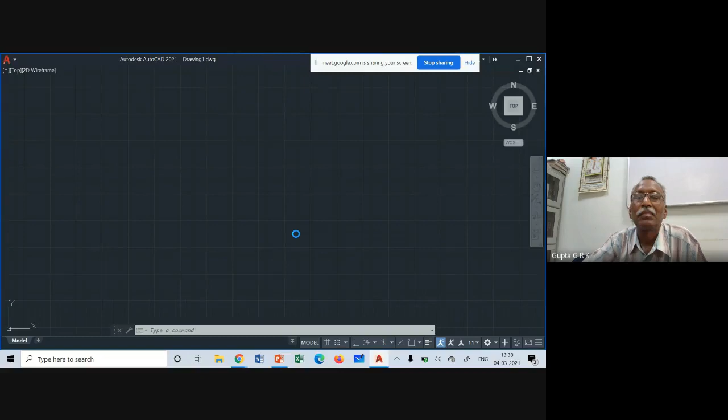So when you have a circular plane or a semicircular plane which is inclined to both planes or something. When it is inclined to one plane, you will see it like an ellipse, that is a perfect ellipse only. But if it is inclined to two planes, the curve that you get may not be, it's a very much distorted one. So we will have only points which are to be joined nicely.

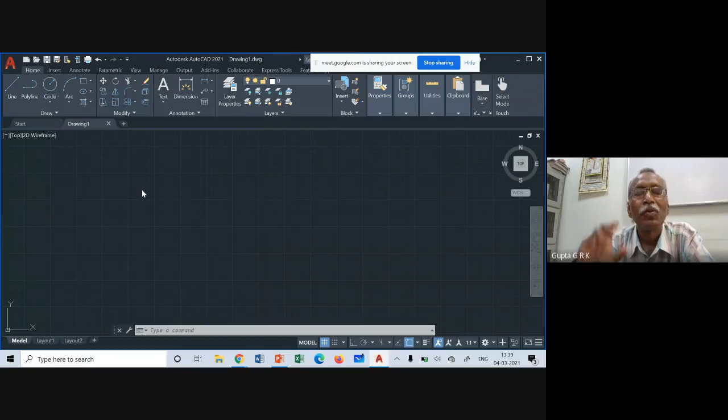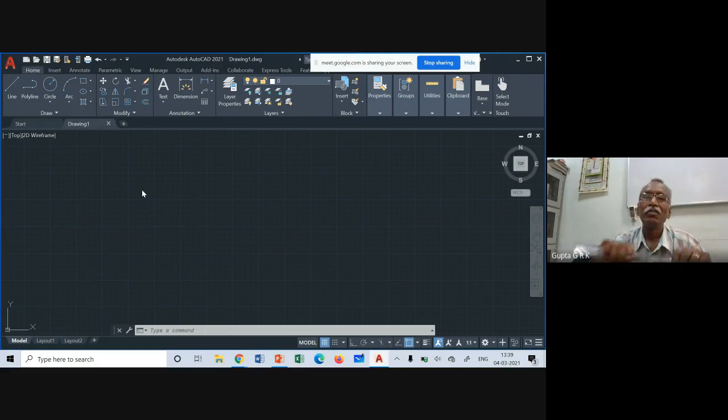There is one particular command called spline. Spline is a term that actually came from old draftsmen. If you have a flexible scale which can be bent like this, so that I can bend it to any shape I want, that is called spline. So if I have a number of points to be joined in a smooth curve, one way is to take that flexible scale and bend it in such a way that it goes through all the points, and then you join. So that is what is called a draftsman's spline.

This spline, also here, if you go to draw and click here, you see the first two curves are there. If you put here, one is spline fit, another is spline CV. So spline fit is the one which we want.

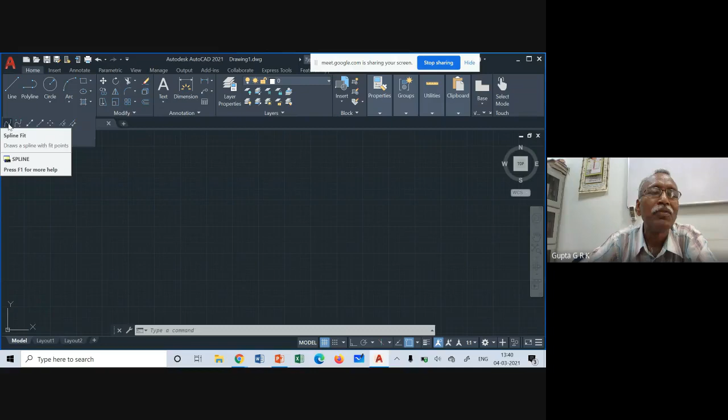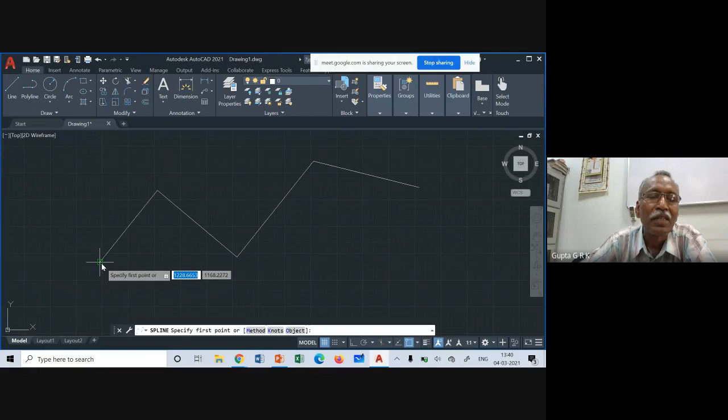So suppose first I draw something like this, some lines I have drawn so that I get some vertices here. If I want to draw a curve going through those vertices, I take this spline and click here. And if you click here, you can see a smooth curve is coming like that, going through those vertices. I can have any number of points like that.

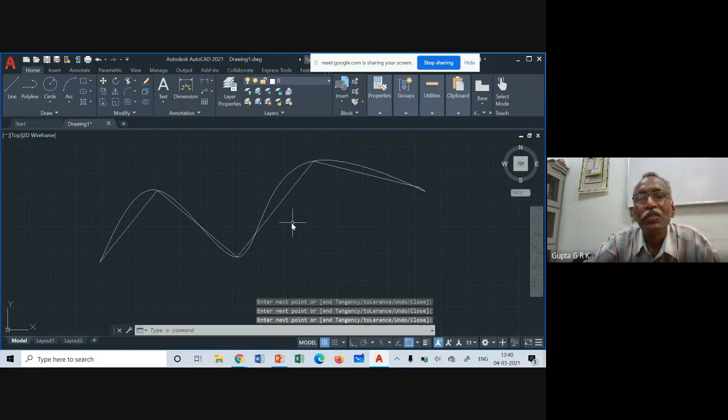Okay, this type of curve is called a spline curve. So whatever complex thing is there, I can join them with a very smooth curve, right? This is one of the best options to have a smooth curve through a given number of points. So that option you can choose.

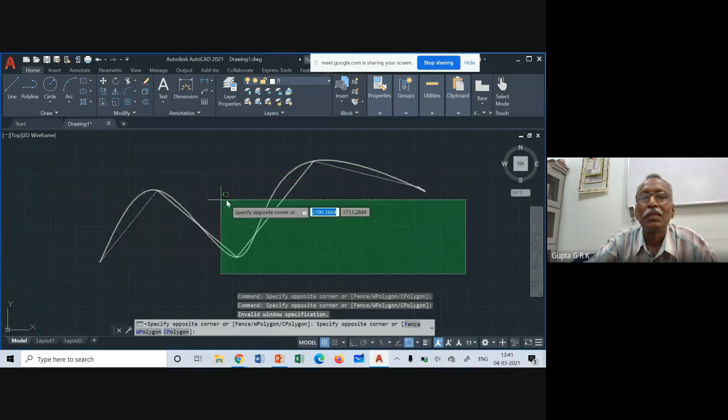And another question he asked: if I am given the true angle of some diagonal, and if I want to turn it into the third position, what is the way I have to go about it? Because in the second position, that diagonal may be shortened. So I have to find out the apparent angle.

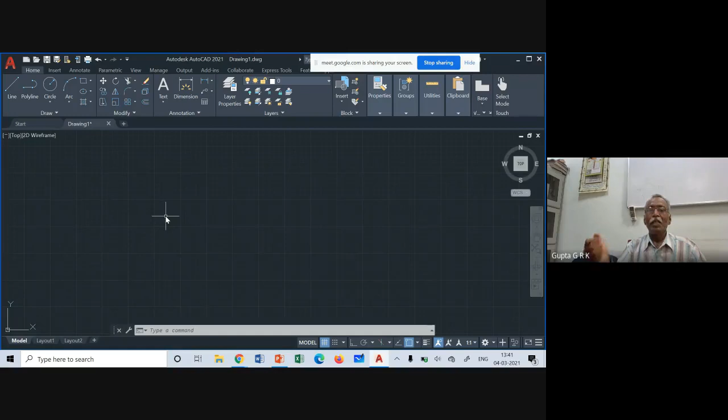Okay, so suppose I draw a line, or take some length of line. So suppose this is a horizontal line, and maybe for example the diagonal may be some 50 mm, and angle may be 30 degrees. And the shortened length may be somewhat smaller. We will see how we can do it.

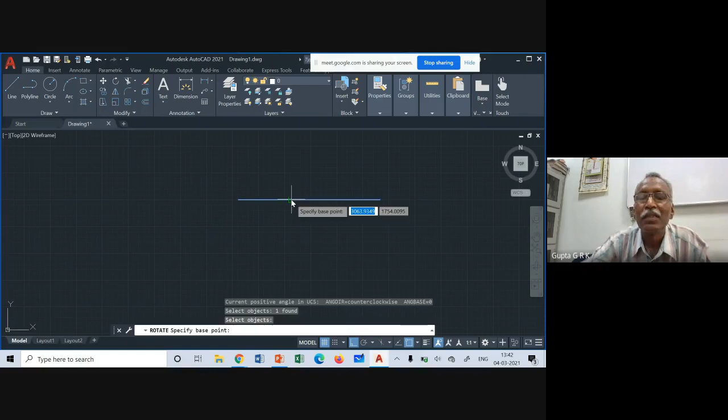First, I have to draw a 30 degree line to this. So I can make it a rotation and choose this, enter, take the base point and type 30, enter. Okay, but I have lost the original line. What I have to do is copy it. So first I draw this line, enter, rotate, enter. Select this, enter, base point, click and copy, C, enter, and then 30, enter. So I got this line.

So on this, I have to mark 50, because 50 is the original length of the diagonal. So what I do is draw a circle. Take this as center, and with 50 as radius, I can draw this circle. So 50, enter.

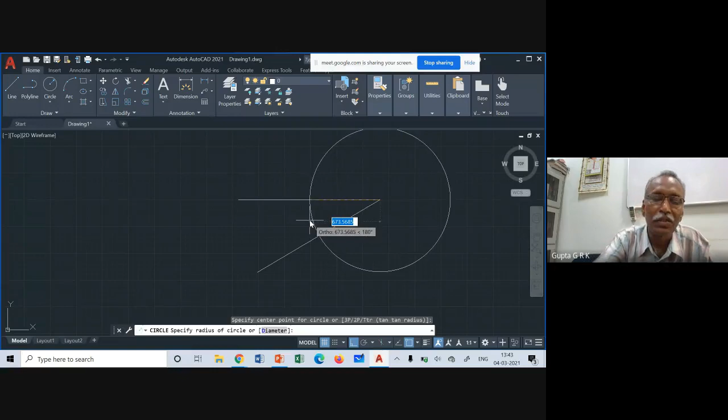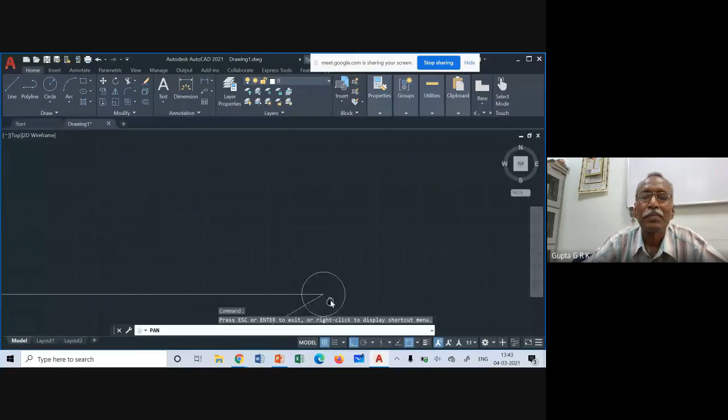So actually now the scale is not that good. Now what I do is use zoom extents. Z, extents. I can make it like this.

So now I have to draw a locus. This is the point of intersection through which I have to draw the locus line. This is the true length, this is the true angle, so I can show them. Okay, so this angle, this is 30 degrees.

And this length is 50 actually. So I have to draw a horizontal line through this. So what I do is take a line command, take the intersecting point here, and draw a line both sides. Okay, I got the parallel line.

And so maybe I have another, suppose, okay I take this, maybe some 32, 35 or whatever it is. Suppose this is the shortened length. This is the shortened length.

So I have to transfer this length to here. I have to cut this line from this point. So what is the way I have to do it? Maybe just, so I am taking some 40, okay, 40 length. It may be 40, 41, 42, it doesn't matter, something like this.

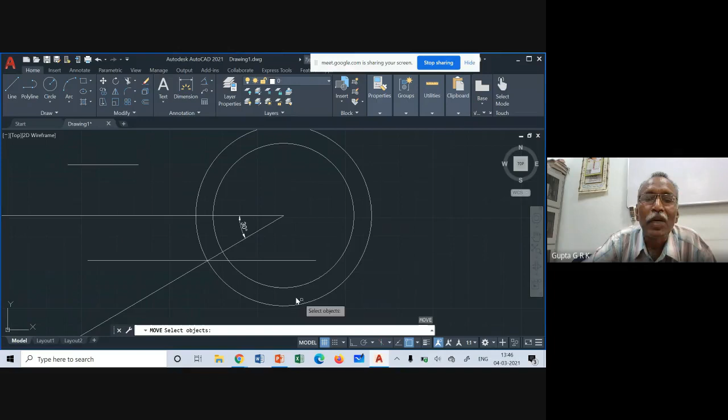I remove ortho. Okay, I do this. Okay, this is the one. So what I am interested in is where this is the shortened length. Okay, this is the point of intersection. So I have to draw this line.

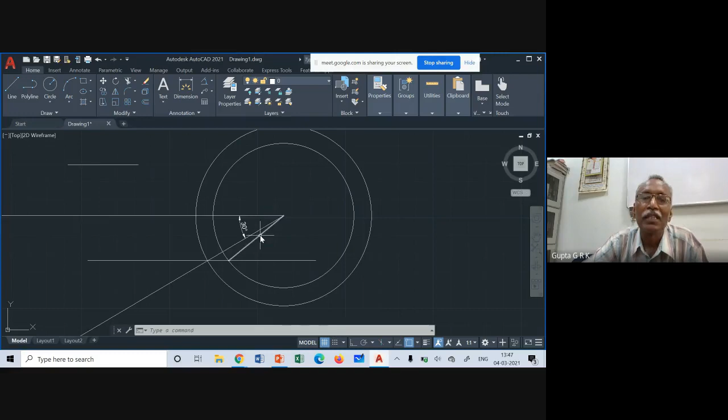So I take the line command, from this point to this point. Okay, so that is the actual shortened length of the diagonal, whatever it is. Now, if I want to find out what is the angle, that is the apparent angle. So I can choose this angle, angular, and take this point line and this line.

So it is 39 degrees. That is the way I can find out what is the angle that I want.

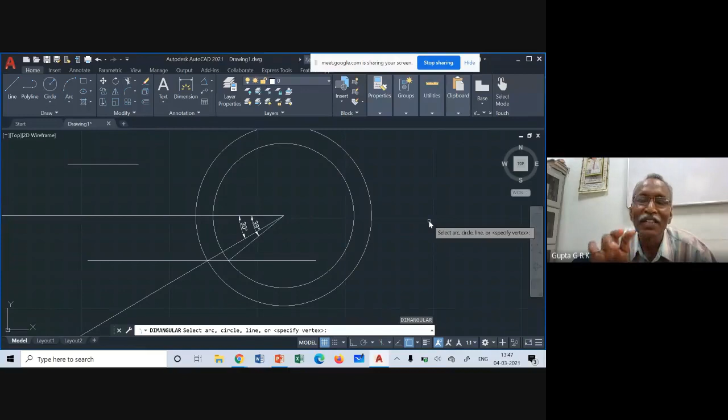Is it okay? Can we also use the arc option? Yeah, you can use it. There is no particular way of doing it. Whichever is convenient for us, we can do that. This is not the only way. There are various ways of transferring the distance. You can use the offset command to find the distance between points. There are different types of commands. You can use whatever way you want. This is just one of the ways I'm telling you.

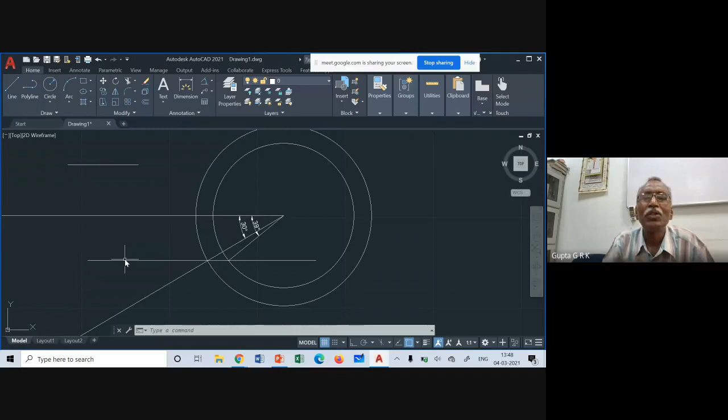Sir, instead of spline fit, we used arc for the previous one. If it comes good, nice, it's no problem. Spline is a curve which goes through all the points in a very smooth way. Arc also is okay, it should look fine.

So it doesn't matter. If you are drawing a conventional drawing, you are drawing with a free hand. Here you are drawing with arc, so that also may be nice. But you can look at both options and see which looks better when you are doing it. You can use arc, okay.

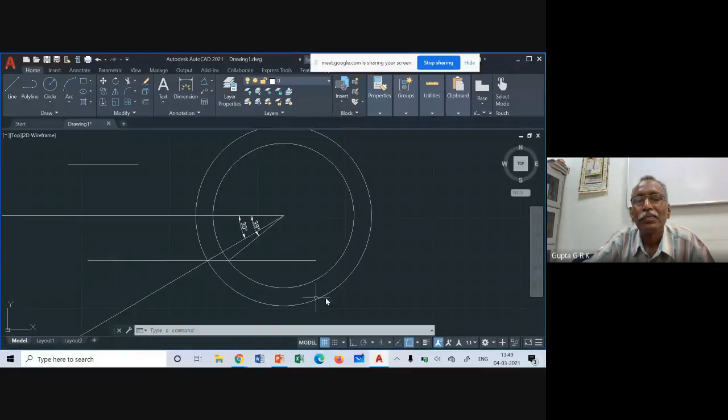Anything else you'd like to ask? Yes sir, the boy has written the question in the text box. Okay, just have a look at it.

Sir, are you able to hear me now? Yeah, I could see it. Now your voice also is okay. Yeah sir, that's right.

What, sir, like for getting a smooth curve or getting an ellipse or something, what is the option we need to use? Yeah, you can use that spline option. Arc option also is okay. That's what I was telling you, both are okay.

Okay sir, thank you sir. Right. Sir, yeah, I had a doubt. Sir, yeah.

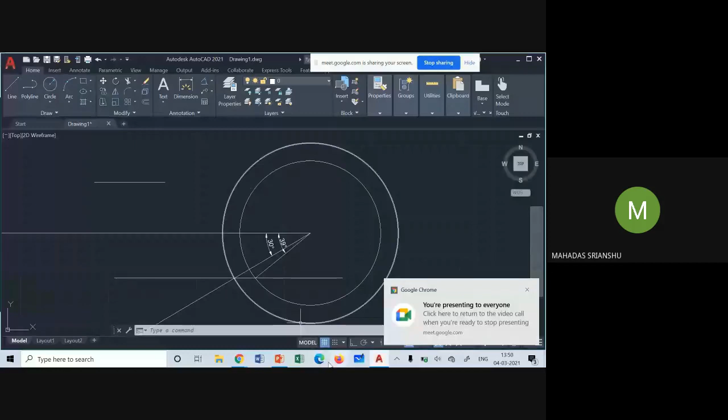Sir, when we were constructing polygons, maybe a pentagon or something, and then we want to turn it at a certain angle, usually, can you show that one sir? Turning it at maybe 45 degrees. Sure.

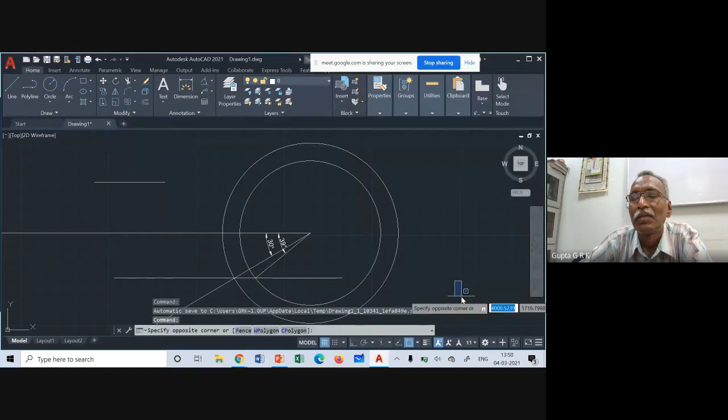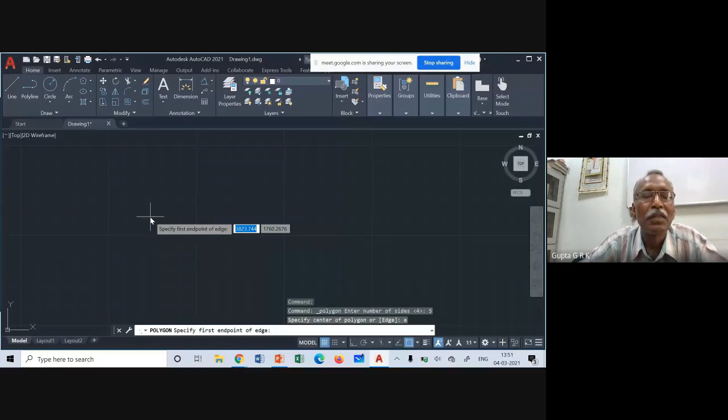Suppose I'm doing a pentagon, polygon of sides 5, enter, and edge I will be using E, and click here, and maybe I'll go to origin, and maybe take 50. Okay, suppose this is what I am having.

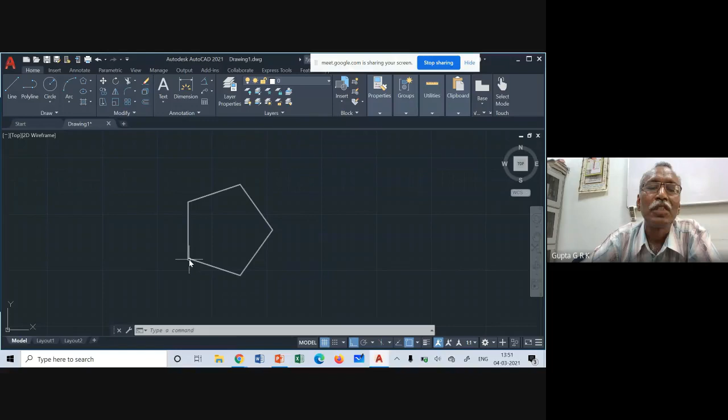So I want to rotate this, isn't it? About this point, about any point you can rotate. It is easy if I rotate about this point so that I can exactly see how it is getting rotated. So what I have to do is take the rotate command and select the object, select it, and enter. Then once you select it, it is asking for the base point. You take this as the base point. And then you have to take copy.

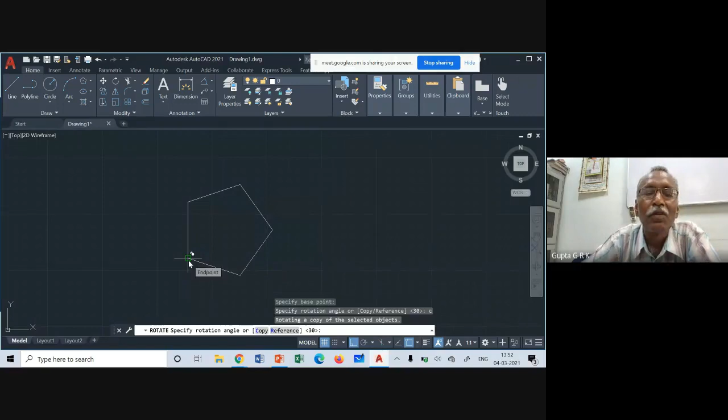If I don't take copy, this figure itself will get rotated. If I want another pentagon with rotation and keeping this as it is, then I have to take the copy option, C, enter, and now I have to give the angle, maybe 30. I'll get like this, so this is rotated by 30 degrees. If you see the angle between these two, it will be 30. Is it okay?

Sir, could we try with another point sir? That is not intuitive. This one was any point, but sometimes it is difficult to understand which is actually turned, which is A, B, C, D, E, which is A, B, which is C, D, like that. It is difficult to sometimes identify.

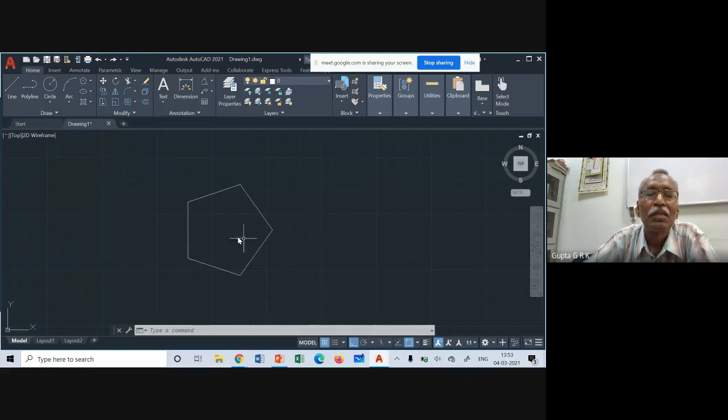Okay, about which point you want, this point? Especially when we're turning it with the diagonals, for example A, C or something like that. See, you are rotating about any point you can rotate, isn't it? But you should be in a position to identify which side is what.

Yes, about whichever side you rotate, about whichever point you rotate, it doesn't matter. But you have to be able to identify which side is what. Suppose if I rotate here, now I moved somewhere here. You don't know which side is what, isn't it? So that you have to be able to identify.

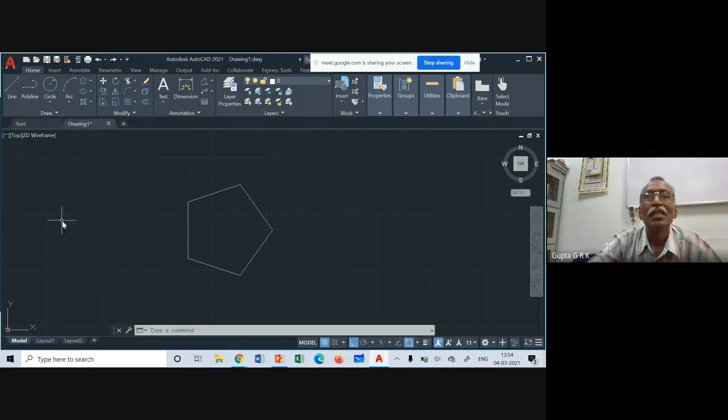Yes, I understood. And it is not about the diagonal we rotate, about a point only we rotate. Whether it is diagonal or side, whatever it is.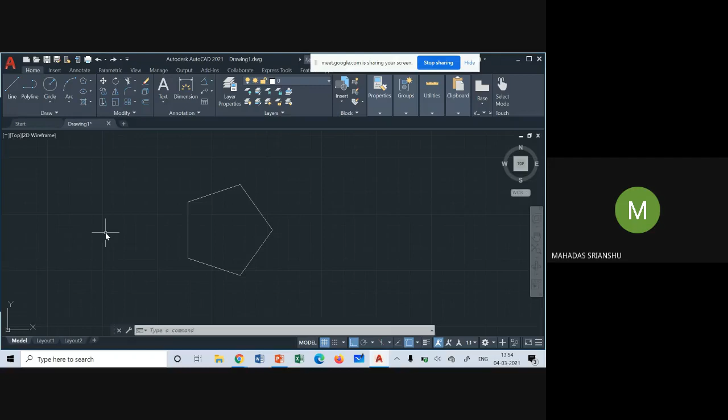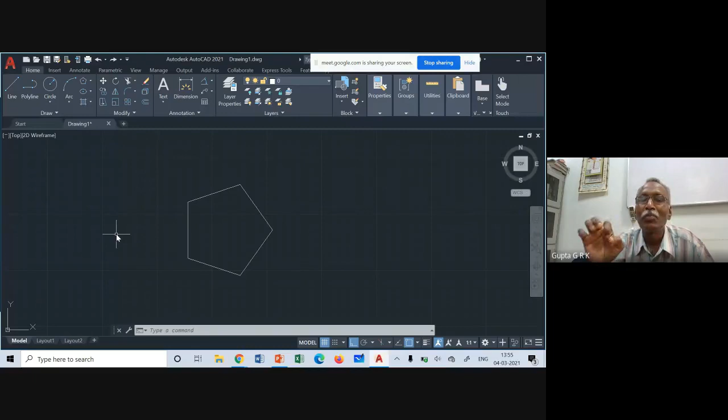In the seventh assignment, when we try to rotate the image at a certain angle, I found a little difficulty identifying which corner. That's why if you rotate about a corner, I keep that corner in mind. Whenever I move it from one place to another, I start with that corner, naming them clockwise or anti-clockwise, so I can identify all the points. Once you are clear about one point, the other points follow either clockwise or anti-clockwise if you follow a particular fashion. Once you get all the corners, there's no problem.

Yes. Yeah. Sir, yes.

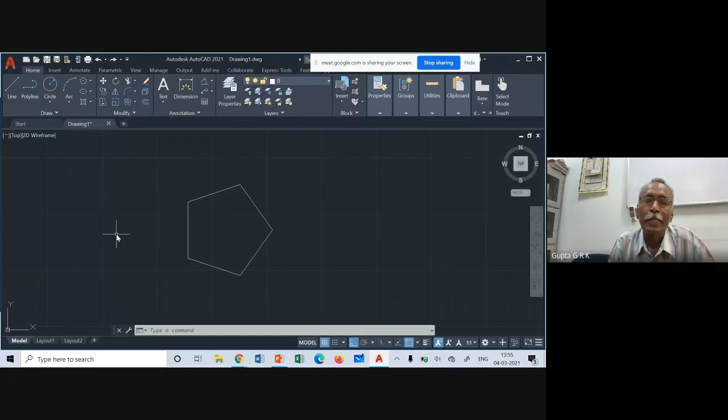I have a doubt related to straight line, sir. If there's a line such that theta plus phi equals 90 degrees, we'll get the top view and the front view perpendicular to xy. Yeah, that's right. If there's a point, say P, on the line AB, and we know its front view P dash, how do we find its top view, sir?

To find the original point, you have to know at what ratio it is dividing. If it is dividing the front view in a particular ratio, in the top view also it divides in the same ratio. Midpoint is always midpoint. A point which divides in ratio 2:3, in the front view and top view it divides in the same ratio. If you know a point there, you will get it like that, or you have to come through the side view.

Okay sir, so we have to consider the ratios only. Yeah, ratios, or you come through the side view. You draw an apparent top view, which is the side view. Draw the side view, and from there you can get it. So from the top view you come to the side view, and from the side view you can go to the front view like that. That is also one way of doing it. Okay sir, either by ratios or by the side view method. Side view. Okay sir, thank you, sir.

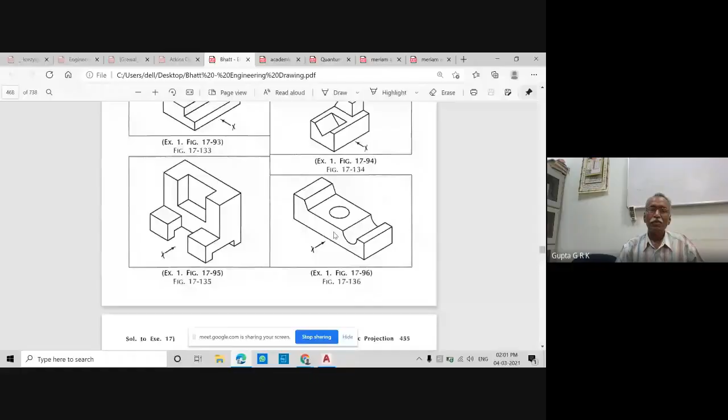Sir, can you see the pointer? It is figure 17.144. Next. Yes, sir, but it's similar only. Means the concept is similar, sir. Both have this semi... this. Okay, similar thing. Okay, similar here.

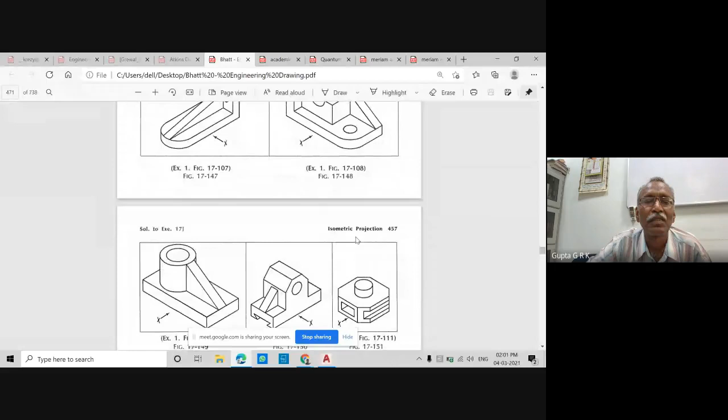Yes, sir. So this part, how to draw in? This part, okay. So actually, yes sir, this part, so you have to draw this part. You have drawn, isn't it? Yes, sir, front part I have drawn, sir. If you have drawn the front part, it is just parallel to that there. Whatever way you have drawn, you have to draw there, and actually complete need not be drawn because only part of it will be seen.

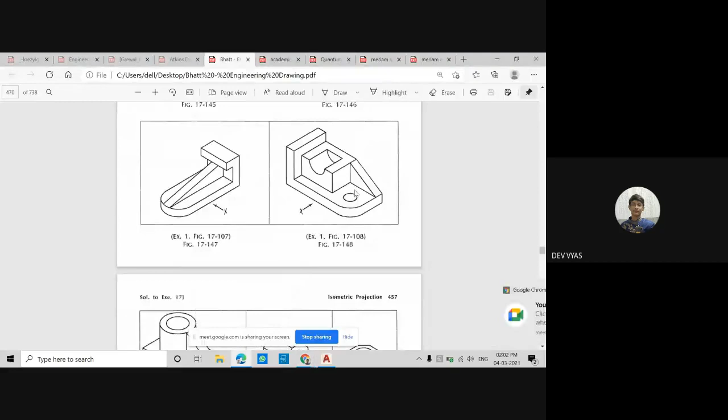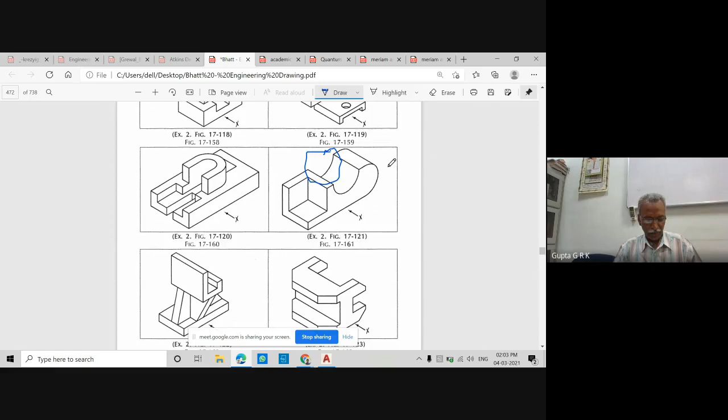So means, sir, but still that rhombus needs to be... Once you draw one curve, right? So you have to draw a parallel curve at a particular distance. Yes, sir. Right? You have to draw a parallel curve at a distance of... so you know the length of it. So you have to draw a parallel parallelogram or rhombus, and then there you have to inscribe.

Okay, so we will need to draw the whole rhombus and erase the leftover ellipse. Yeah. Okay, fine, sir.

Only isometric projection needs a little bit of imagination. All other chapters, you can just follow the rules. If you follow all the rules, that is sufficient, because we have followed or formulated the rules by visualization. And once you understood the rules, then you need not try to visualize later for sections, solids or planes.